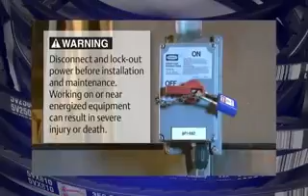Improper belt tension is one of the most critical aspects when we talk about combating premature belt failure. Under-tensioning can cause the belt to slip, leading to premature belt failure, while over-tensioning can cause bearing and belt failure.

In most cases, technicians use a rule of thumb to estimate proper belt tension, the most common being 1/2 inch deflection, or deflecting the width of the belt. But in both cases, technicians fail to take into account the amount of force required to deflect the belt that distance. Ultimately, tension is a function of two things: deflection and force.

To measure both of these accurately, you will need to use a tool such as the Browning spring-loaded tension checker and follow the steps outlined in this video.

The first step in measuring proper tension is calculating deflection. Deflection is a linear equation in that you deflect the belt 1/64 of an inch for every inch in span.

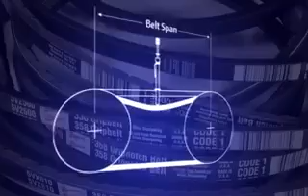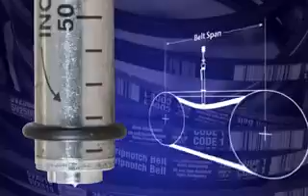Setting the required deflection on the Browning tension checker can be done by measuring belt span and then setting the bottom O-ring on the tension checker at that point. So in this application, I use a straight edge or a tape measure and I measure span at 15 inches. So 15 inches is the point at which I will set the bottom O-ring for proper belt deflection.

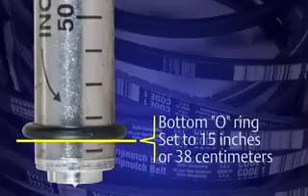Now that you have the bottom O-ring set at 15 inches, you can set the top O-ring at 0. This is done by sliding the small O-ring down the plunger until it touches the yellow or white stop.

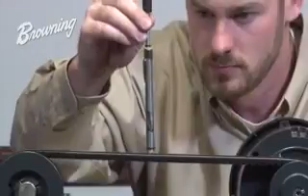Okay, now we're ready to take a tension measurement. By placing the tension checker in the center of the belt and in the center of the span, slowly push down on the rubber knob mounted at the top of the tension checker, stopping when the bottom of the O-ring is in the same plane the belt was previously in.

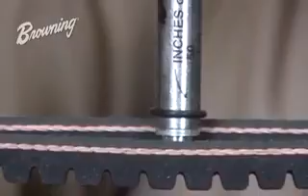Referencing the plane the belt was previously in can be determined by two methods. In a multiple belt drive, simply deflect until the bottom O-ring is in line with the top of one of the other belts. In a single belt drive, you will need a straight edge or a piece of string to run across the top of the belt, and then deflect until the bottom O-ring is in the same plane as the straight edge or piece of string.

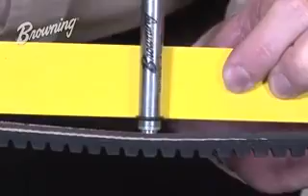Now that we have deflected the belt the recommended amount, the top O-ring will have moved up the plunger and show us the amount of force used. In this case, we have a tension measurement of about 7 pounds.

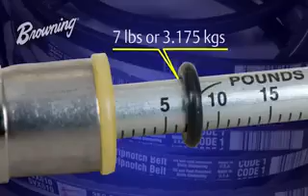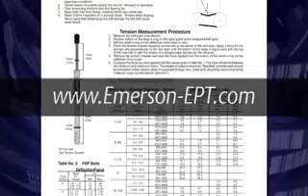We can compare this to the deflective force charts found in the Browning bearing and belt drive reference guide. These charts can also be found in the V-belt drives and bearing product guide, inside the cartridge the tension checker came in, as well as online at emerson-ept.com. To use the charts, you will need 5 pieces of drive-specific information.

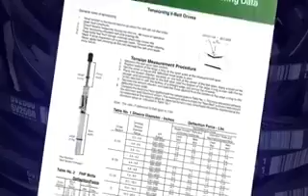In this case, we're using BX belts. Our small sheave is 3.5 inches. Our motor speed is 1750 RPM. We're using Browning Gripnotch belts, and these are new belts.

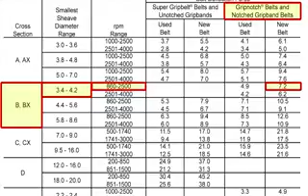So if you follow the charts from left to right using those drive specifics, you will see that our deflection force should be 7.2 pounds. Our initial measurement of 7 pounds is very close to the recommended deflection force.

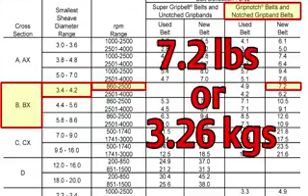Please keep in mind that tension is always changing. As the drive runs, as the belt seats, and as the belts wear into the groove of the sheave, you are going to see tension change. In an optimum situation, we would recommend to retension after 20 minutes, 24 hours, and again after 48 hours.

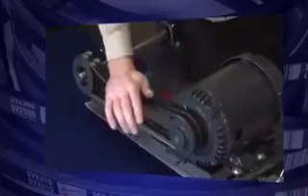I realize that in some cases, retensioning periodically is simply not possible. So we recommend running the belt drive a few revolutions with your hands. This is just simply to start the seating process. What this does is help the belts wedge down in the groove of the sheave.

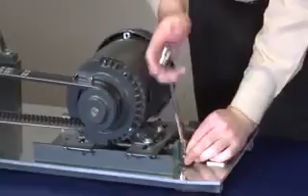Once the belts have been properly seated, you will notice a decrease in deflective force. Now we need to go back and retension to the recommended 7.2 pounds. Then, going forward, retensioning will be required at each PM interval.

Please keep in mind, after 8 hours of operation, a belt is considered used, and should be retensioned to the used belt specifications found in the deflective force charts.